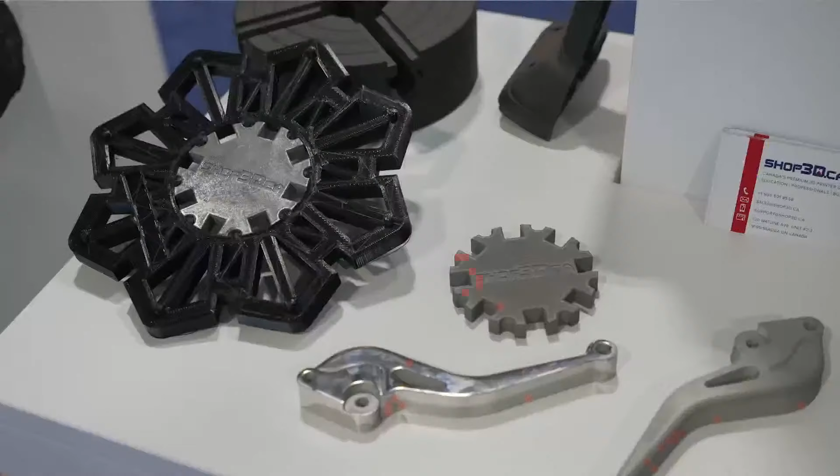Recently, we were at CMTS, a trade show here in Toronto, Ontario, where we had a lot of great questions about this metal filament that BASF has for us for FFF printing. Before we get into that, I want to bring in Emma, who will introduce herself shortly, to talk more about this very specialized filament.

Emma, how are you? Doing great, Ken. Thanks for having me. How about you? Fantastic.

So thanks for joining me today. I wanted to talk to you and have you introduce yourself, who you are, what you do, and also where you're located.

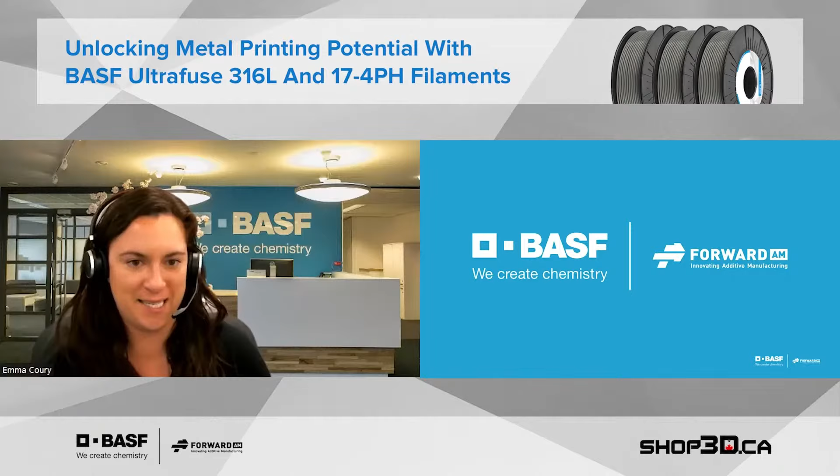Yeah, sounds good. So, hi everyone, I'm Emma Coury, and I am the Applications and Technology Specialist for our filament product line at BASF. So I know that's a lot of words. Really, what I do is I work with our end customers, our distributors like Shop 3D, machine manufacturers, really on any technical project we have for our Ultrafuse filaments. And I am located at our Application Technology Center in Detroit, Michigan.

Amazing. And we're focusing on this metal filament today, but tell us a little bit about BASF Forward AM and what you guys do, in terms of your whole portfolio.

Yeah, absolutely. So at BASF Forward AM, we are the 3D printing group within BASF, which is a really big chemical company, if you're not familiar. BASF Forward AM was established in 2017. Our headquarters are in Heidelberg, Germany, but now we have locations in the US and Asia as well.

We have three product lines: powders, resins, and filaments. I'm responsible for our filament product line, and within that, we have your standard materials that you would use: PLA, ABS. We also have other engineering grade filaments, such as flame retardant options. We have glass fiber and carbon fiber filled materials. We also have TPUs, support materials, and as Ken mentioned, what we're talking about today are our metal filaments.

At Shop 3D, we carry almost all of those BASF filaments, and we love it because it has such a wide engineering range of capabilities. You can pretty much find a filament tailored to your application from the entire portfolio. But of course, today we're going to be talking about one of the ones that we're most excited about, which is metal.

Before we get into metal, maybe I'll just start from the very beginning. Can you give me a brief rundown of what metal filament is and what kind of printers we can use with this filament?

Absolutely. So for the Ultrafuse metal filaments, it's a metal powder combined with a polymer binder system. That polymer is what allows you to actually extrude this material, melt it down. It's not just a bunch of metal powder, which would be a lot harder to process.

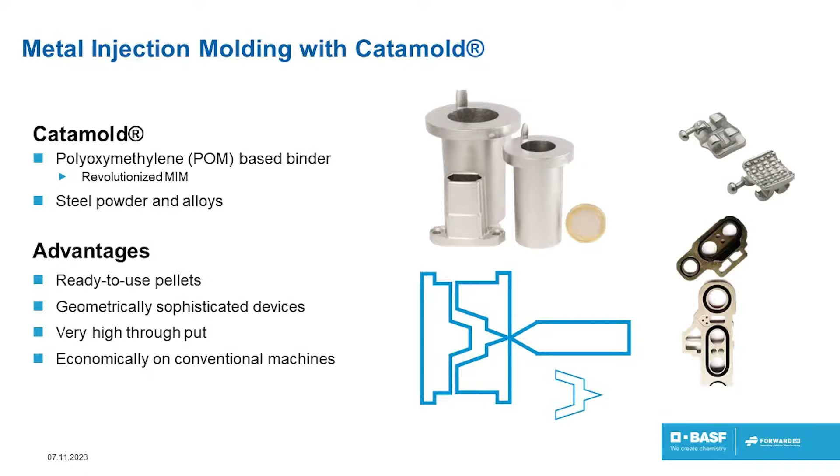For our metal filaments, they can be used on pretty much any open FFF system, which is really convenient, makes it really accessible. In our traditional BASF business, we have what is called the CATAMOLD product line. This is a metal injection molding process, and our Ultrafuse metal filaments are all based on our traditional CATAMOLD technology, really pulling in a lot of that know-how to then create metal filaments exclusively for 3D printing.

Yeah, and this is definitely a first in the industry, and one that really lowers the barrier to entry to printing with metal filaments because, as Emma said, you can use printers like the Ultimaker back here, or you can use Raise 3D, BCN3D, names that we carry, to print this filament. Whereas previously, you would need a much more expensive, much more intense system to do metal 3D printing. So this has really lowered the barrier to entry.

And I think we're going to see some amazing results from this, but I think you have two types of metal filament: 17-4PH and 316L stainless. Maybe you could talk a little bit about the differences between the two and why you have two different options.

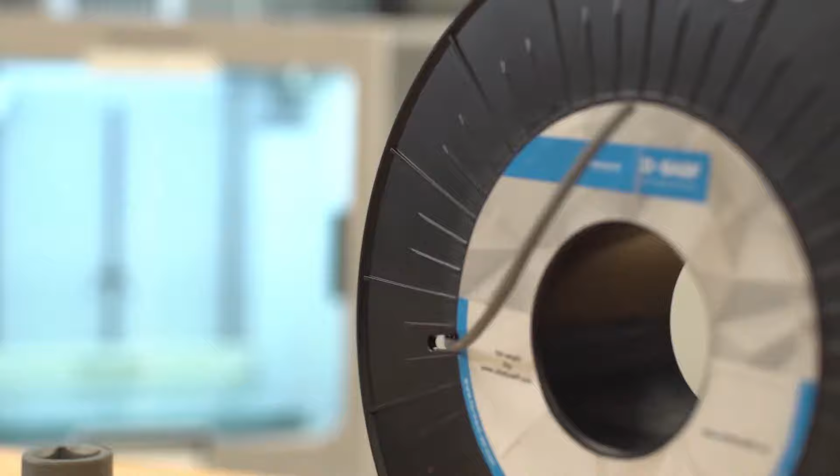Sure. So, as Ken mentioned, we have two different metal filaments. For 17-4PH, the biggest advantage there is really enhanced mechanical properties. It's a very common industrial stainless steel, good mechanical properties, and you can heat treat this metal for even better mechanical properties.

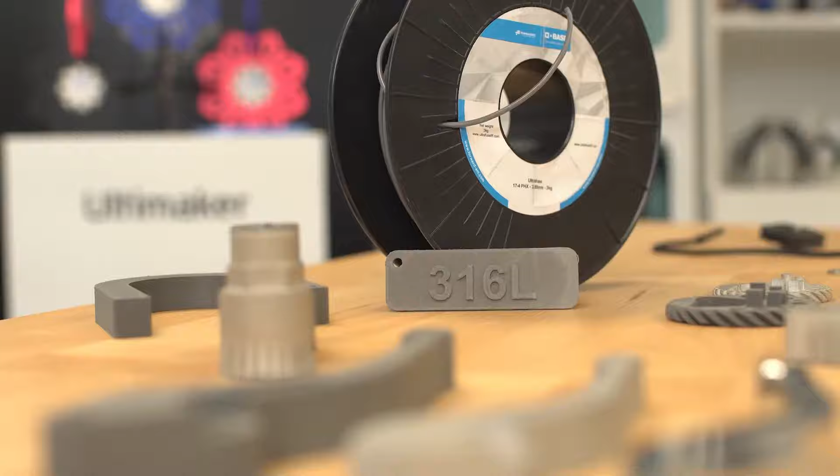When it comes to 316L, it has really good corrosion resistance, and it also is good in high temperature or more humid environments. So those are the big differentiators when you're looking at choosing one over the other. If you're really looking more for the mechanical properties, go for 17-4. And if you need that more specialized corrosion resistance or humid environment performance, then go for 316L.

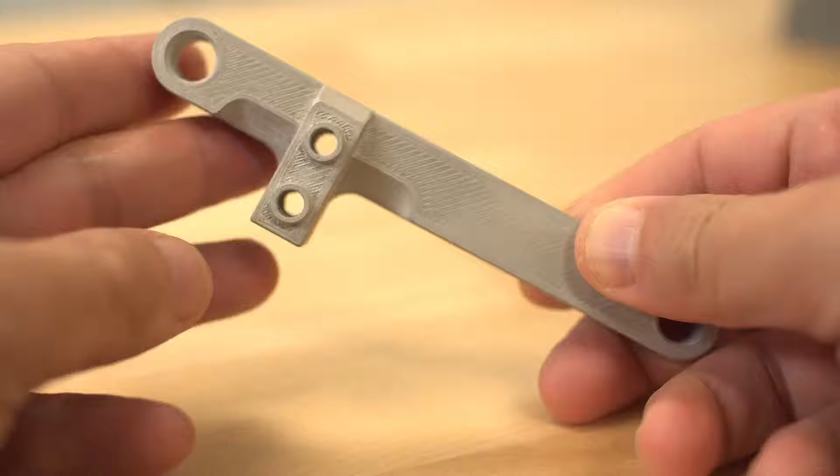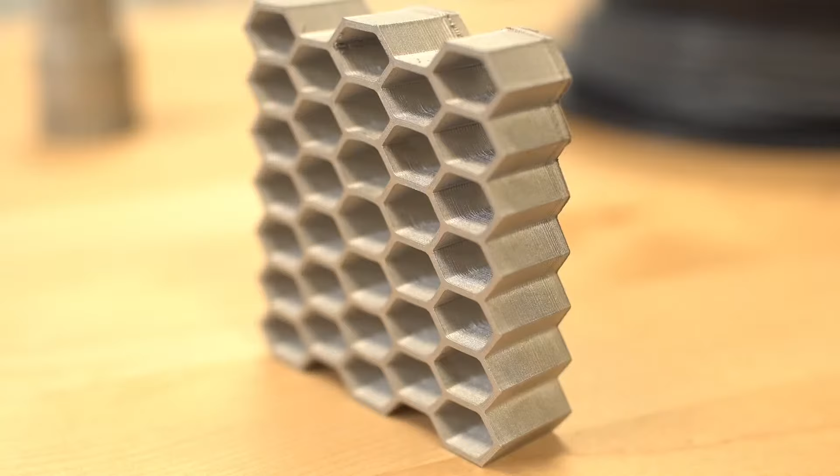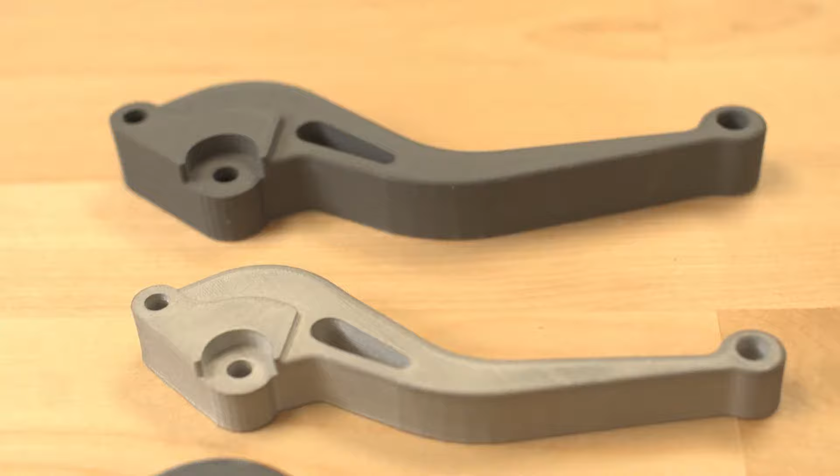And what would be great examples of some simple applications for each of those materials? Yeah, so for both materials, they can be used for customized tooling, jigs and fixtures, and prototyping. These can also be really good for replacement parts. Maybe you have that super old part in your warehouse that you broke or you'd like to have a backup, and getting a new one is really expensive, but you could 3D print it instead, making the cost much cheaper. They're also great for small series production. So if you want to manufacture maybe 100 parts versus 100,000, metal 3D printing is a great place to go for that.

I think one of the things I forgot to address is that sometimes people think metal filament is like the aesthetic metal filament where you have some copper powder inside a PLA and it looks metal, but you're not going to get an essentially metal part. That's not what we're talking about here, right?

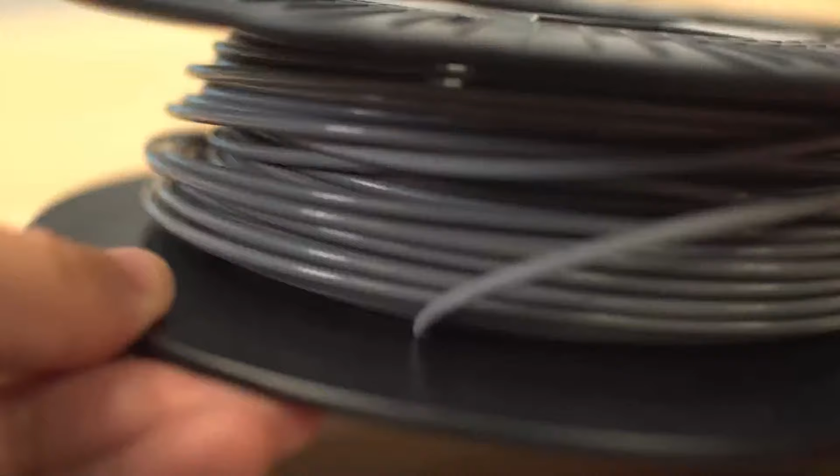No, so this is a true metal filament. When you finish the full process of printing and going through debinding and sintering, you end up with a fully 100% metal part. A lot of people ask me, is it metal? Is it fully metal? Yes, it is. And just to prove the point, I have a couple of metal pieces here, just listen to this. That's going to tell you it's pure metal all the way through, and it's as strong as it sounds. So it's a pure metal print after we get it processed.

But before I get into the processing, let's talk a little bit about the workflow. I think a lot of people are very interested about how they can go from getting a printer and this filament to coming out with a metal piece. Can we start at the very beginning and talk about printing it on the printer? Do you have some best practices? Is there anything special that you need in order to print this filament?

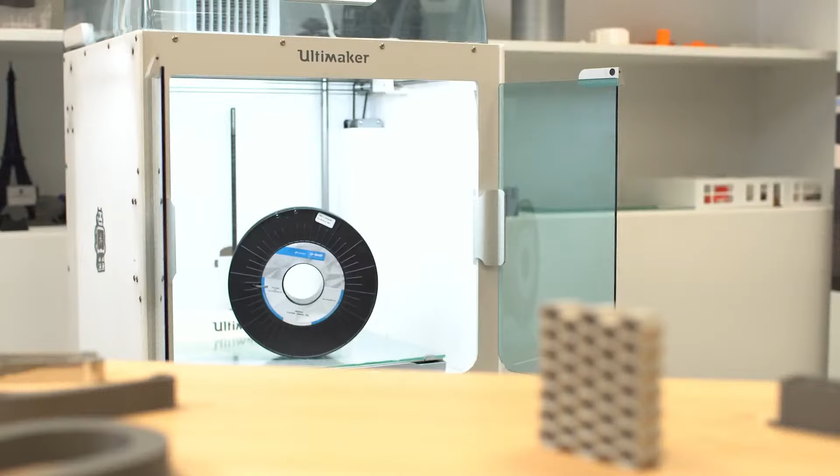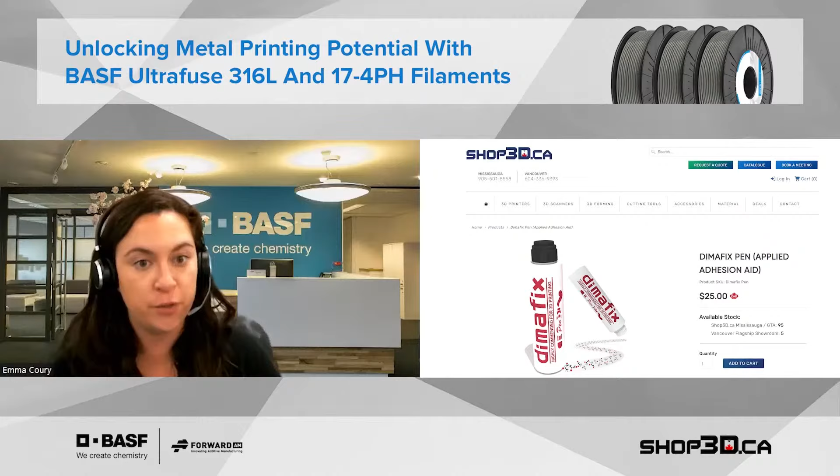Yeah, so for printing a metal filament, I know a lot of people think it seems really daunting, but if you are out there printing a carbon fiber filled material, you can print a metal filament as well. So what I mean is, you don't need a dedicated system or really high temperatures. You can print it on your Ultimaker that Ken has sitting behind him. But what you do need is a hardened nozzle, same thing you would need for other fiber-filled materials, and some adhesive. We generally recommend Dimafix or Magigoo Pro Metal, that's their specific metal adhesive for our materials. Put that down on your bed and you should be ready to go.

And you may think I missed a step, which is drying your filament, but with metal, you actually don't need to dry it, which is another very convenient aspect. That's fantastic. A lot of people worry about that when they're printing with fiber materials like nylon, it absorbs a lot of moisture. So it's very good to know.

In terms of actual printing, what about settings and preparation? Do they need to do anything in their slicer to prepare for metal printing? So to prepare for slicing your part, the main thing to know is that your part will shrink as it goes through the debinding and sintering process. So when you're slicing, you need to scale that part up. In the X and Y direction, we recommend scaling to 119%, and in the Z direction to 125%.

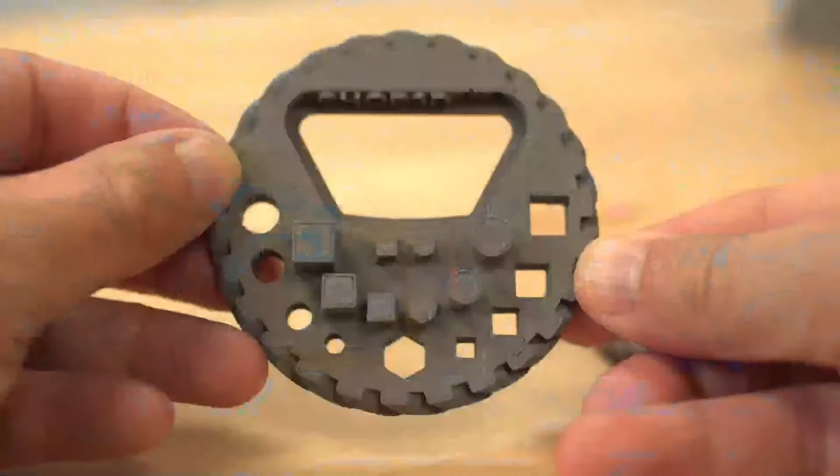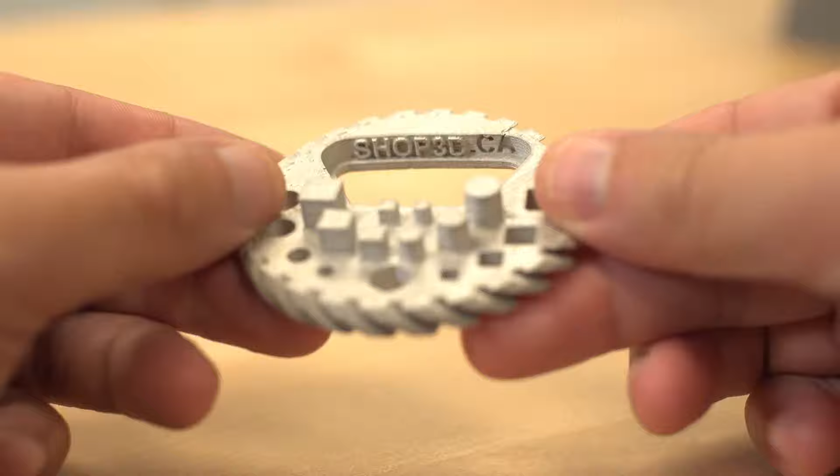Now that's interesting, because why would there be more shrinkage on the z-axis? I guess it's not more shrinkage, maybe it's just gravity. It is exactly gravity. Yep, and that's definitely something we always want to keep in mind with debinding and sintering, is even in the shrinkage you see the effect that gravity can have on a part. And if you design really complicated things, gravity will also affect those. So always good to keep that in mind.

Yeah, I think we'll get a lot into that with the debinding process, but good to know about the shrinkage rates. In terms of handling the printed parts, I actually have a green part that we've printed here, a brake lever, and eventually it's going to get sintered into this part. But what are some of the good practices we should have when preparing a green part before we go through the debinding and sintering process? Yeah, absolutely. So one thing that I get asked a lot is, when your part is printed and it's on the build plate, it can be really hard to get off the build plate.

Something to note before you even get to the green part: to get the part successfully off the build plate without cracking it, soak either the build plate or pour some water on the part. It will dissolve the adhesive and make it really easy to remove. Definitely an insider tip that makes life much easier when removing parts.

Once you get to your green part, you really want to make sure the bottom surface is flat, so you can sand it down. You can also sand the edges. If one part was over-extruded, the green part is fragile, so you can cut it with a blade or sand it down. You can really do nice processing in the green state to get a better looking final part, and even bead blast to remove some layer lines. Working with your part in the green state can really improve the final result.

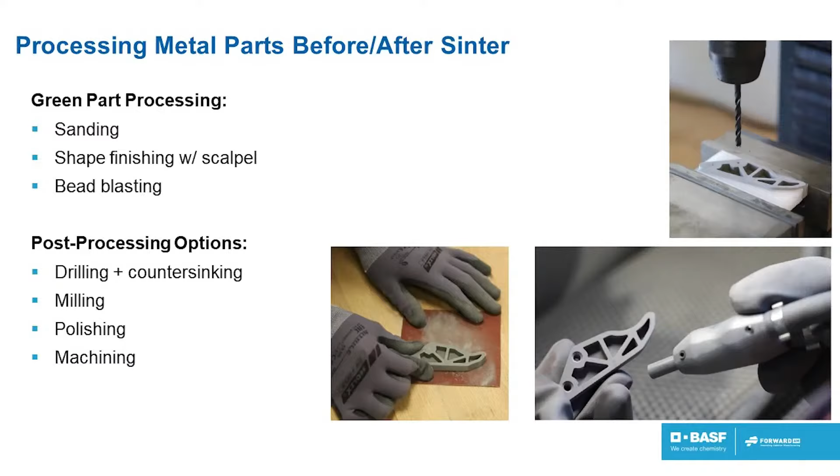That's a good note, because sometimes you have little bits of filament sticking out. You should definitely cut that off and clean it up while it's still in the green state. You can polish it a bit to make it smoother before debinding. The main ways to do that are sanding or bead blasting, which cleans up the surface nicely.

You mentioned it's fragile. So this part is not a finished metal part yet, so I can't treat it like one. If I drop it now, I could break it. Is that correct? Yes, exactly. Even though we'll eventually get to a really strong, durable metal part, right now it's pretty fragile, so definitely take care with it.

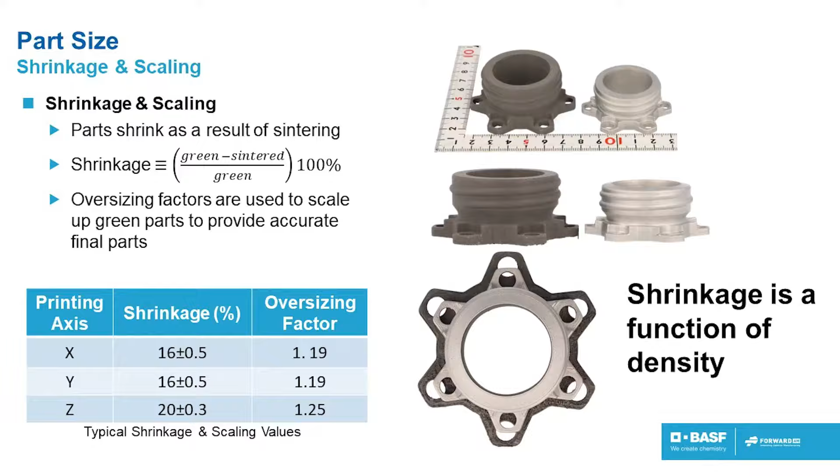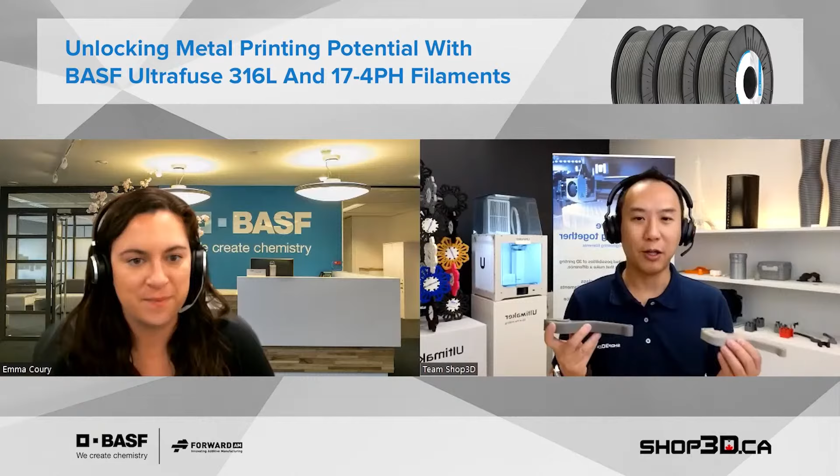So eventually it's going to become a metal part. Maybe I can talk a bit about shrinkage, and also using a raft or some design specifications and recommendations for a more successful print. The process going from the green part to the sintered part, where we don't handle it, is kind of the riskiest part, where the part can fall apart. What are some things we can do to ensure the best success possible?

Starting with your green part, since you have to ship it elsewhere for debinding and sintering, when you ship it make sure it's wrapped in bubble wrap. We like to say make sure your package passes the shake test: if you shake the box and can hear parts moving around, add more bubble wrap. You can never go wrong with more bubble wrap. Really take good care of your parts so they don't break in shipping.

What you also need to look out for is designing for debinding and sintering. If you're printing other filled materials, you can print metal, but the big difference is some of the design constraints. So what are we talking about—handling, support, or overhangs? Kind of all the above and in between.

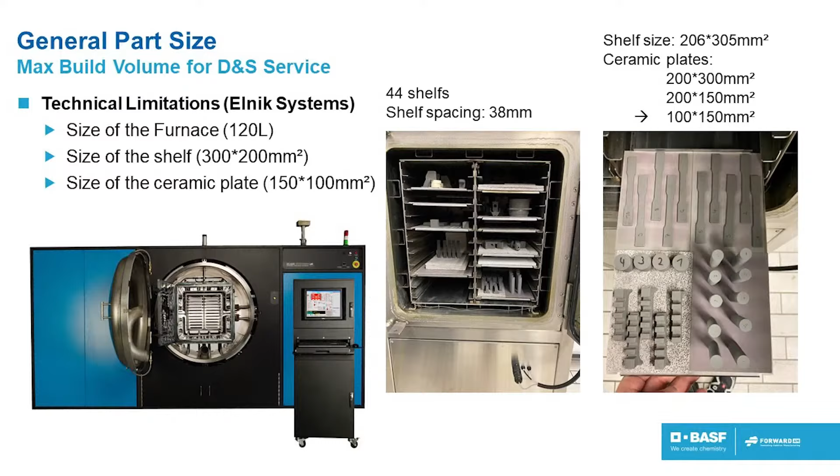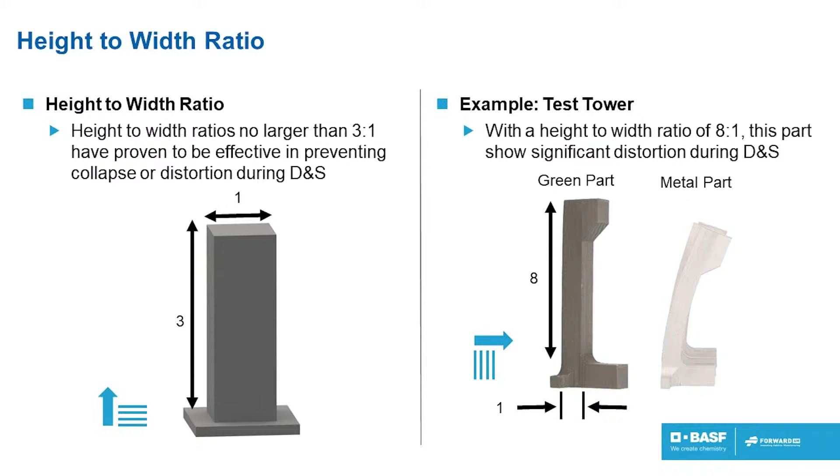One thing to really know is the size limitation. A good quick reference is about the size of your fist—that's about the ideal part size for metal printing. If someone has a huge part they want to print, it might not be successful or the right application for metal 3D printing. You need to scale up to size. Also, avoid a really tall, skinny part, since it could fail in debinding and sintering or collapse under its own weight. Make sure you have an optimal height to width ratio, ideally not exceeding 3 to 1. Also avoid really tall, skinny, thin walls, since some small features might be too fragile to survive the process.

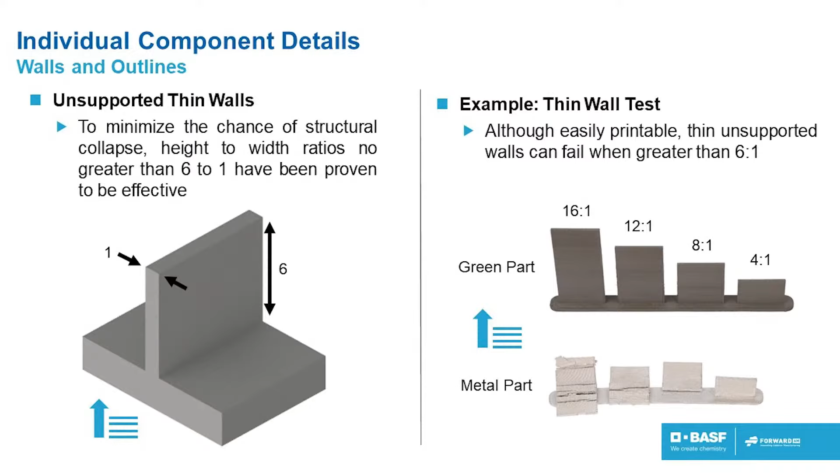I think you already mentioned the shrinkage plate. That one is a really powerful tool and something that can help get geometries that maybe we couldn't have processed before without them warping.

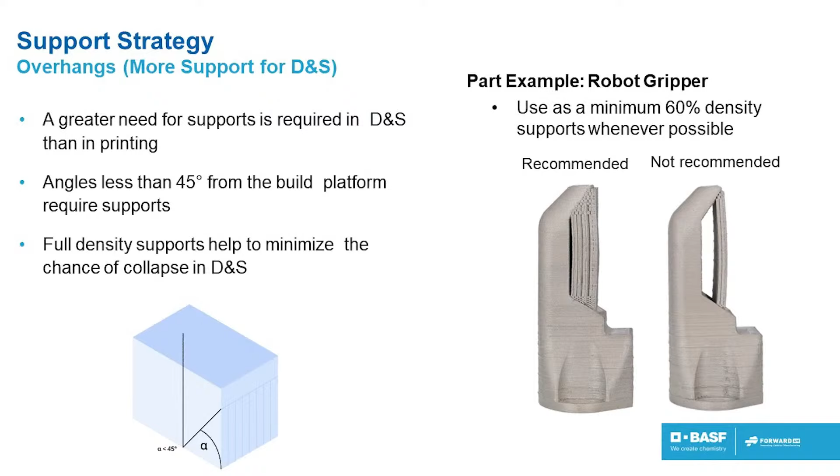So what about overhangs? How do we handle overhangs and support? Depending on where the support is needed, it's possible to print overhangs with metal support, so basically you're self-supporting. Your metal will survive through the debinding and sintering process, supported all the way through, but that means you would need to machine those supports off. So if you have those capabilities in-house or easy access, that really adds on to the possibilities of what you can do.

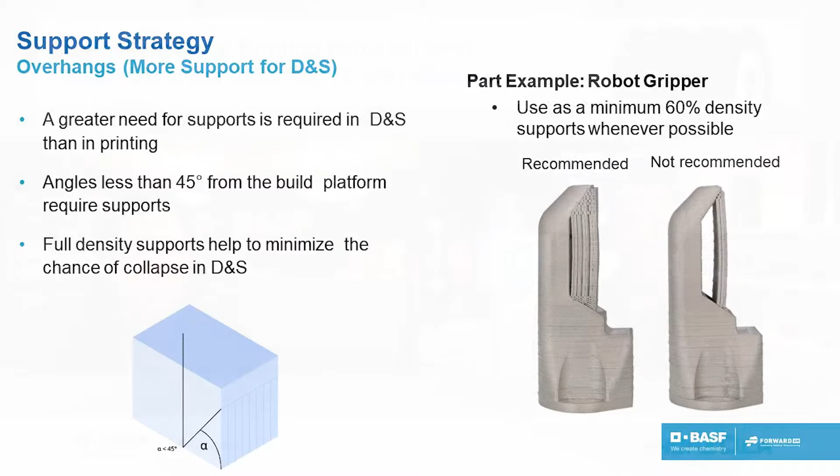Also an option is printing a separate support - maybe if you had an overhang, printing essentially the inverse of your part separately from the actual part. Something really helpful they can do when you send your part for debinding and sintering is spray a ceramic coating on that support. That keeps your support and part from fusing together, but you're still able to support your part throughout the whole process.

So I guess that's safe to say that if you were doing very complicated parts like that, either with thin walls, tall structures, or large prints with support, that almost gets to another level of difficulty that you kind of want to work yourself up to from printing metal. Is that correct?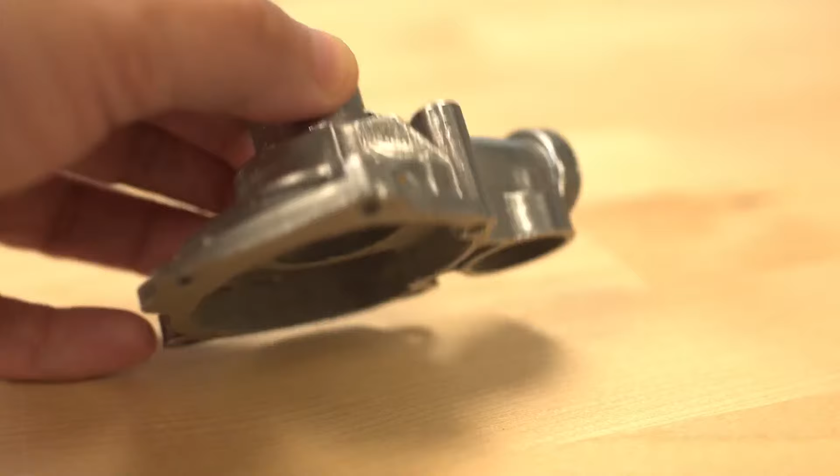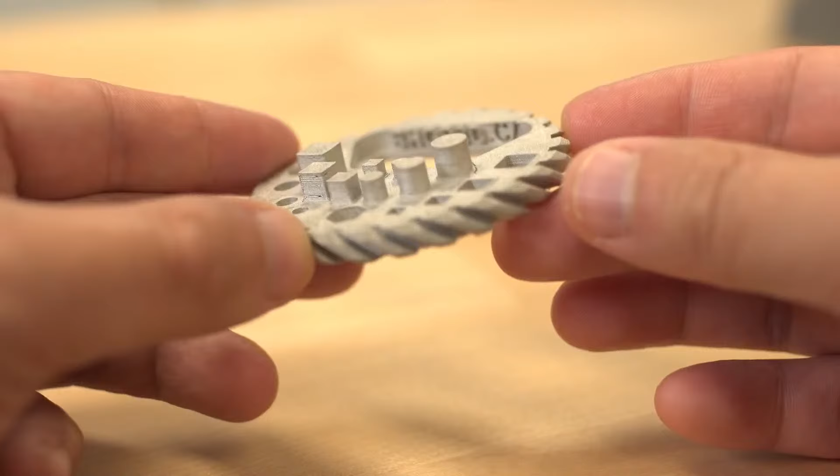Yeah, I would agree. I generally, when people are starting out, like to tell them start with something that is going to work just to get a feel for the process. I think that alone can really give you a better understanding, and then start getting into those more complex geometries. Fantastic, so it sounds pretty simple so far.

We print our green part. We can follow a design guide - I think there's one provided by BASF on best practices and what we should follow in terms of design. So after we do all that and have our successful green part, what happens next? How do we get this into metal?

We actually don't handle processing the green parts here in my lab. We partner with DSH Technologies. They are located in New Jersey and they service all of our North American customers, including all the Shop3D customers as well.

We make a coupon available to purchase on our website where you can buy 1 kilogram of sintering for your metal filament. I think it's only $60 Canadian, which is extremely affordable for the work they're doing in debinding and sintering. So maybe I'm going to let you talk about what that process is like.

Sure. So basically you will ship your green part to DSH, and they are the experts in this process - that really takes a lot of the expertise away from us, and you can rest assured your parts are in the hands of experts. What they're going to do is put the parts through catalytic debinding, and what that does is basically use acid to eat away at all of that polymer binder that is in the metal filament. After that, when you have no more polymer binder, we call it a brown part.

This brown part also has the consistency of like wet sand, so that's really where these design considerations we were talking about come into play, because you need your part to survive in that wet sand consistency. After it's in the brown part phase, the part will then go to a sintering furnace and the metal particles will all be sintered together. This is where that shrinkage occurs, because there's a lot of open space now that all the polymer is gone, so your part will shrink down.

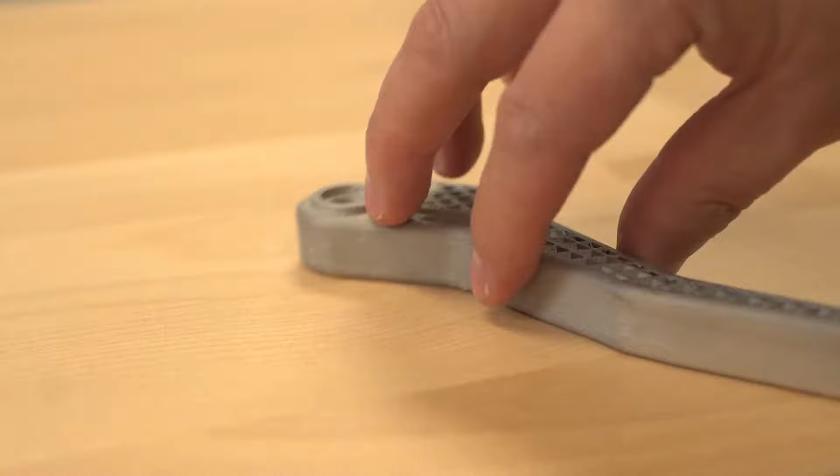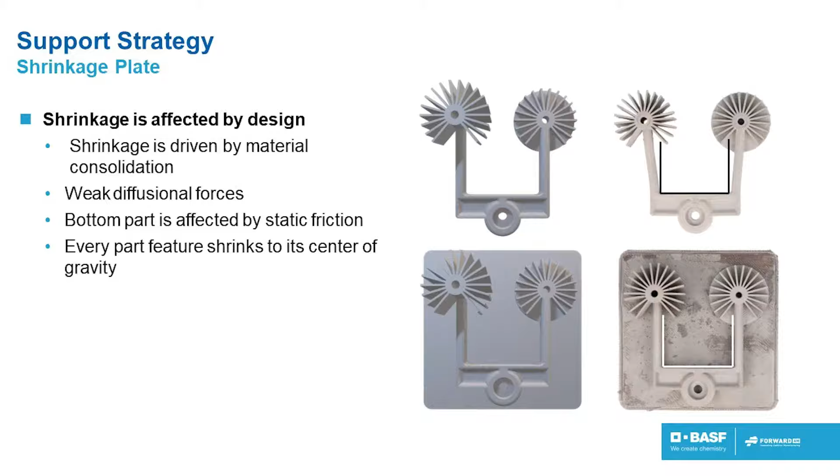Sure, one of the first things you mentioned was warping. A lot of times we'll see warpage, maybe with a more unique shape or a longer part, but a shrinkage plate can really help with a lot of that. A shrinkage plate is basically a separate plate from your part, very dense, printed with highly filled material - just a metal plate you put underneath your part, making sure it surrounds the entirety of your part. When it's going through that sintering process, as it's shrinking down, everything will shrink at the same rate. There won't be as much friction as if your part was resting on a typical plate that isn't moving - everything can shrink in a uniform way, and that really helps with warpage.

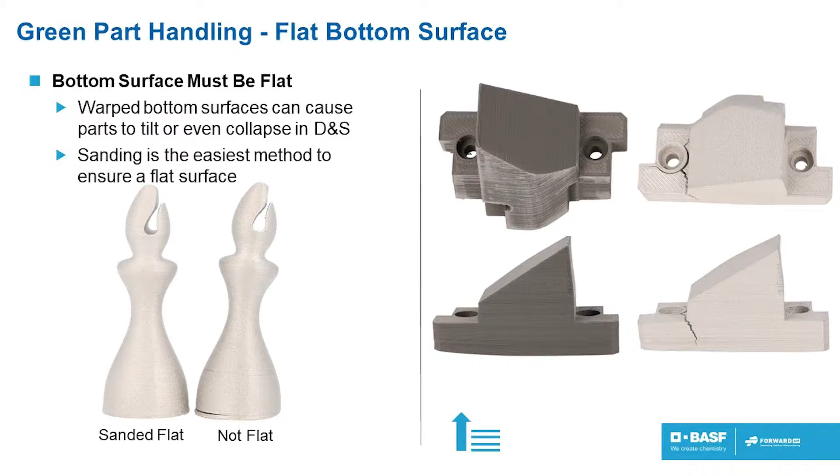The other really important thing I like to point out is that the bottom of the part you send in needs to be super flat, completely flat all the way across. If you tap your finger on it and something's lifting up, you're likely going to have a problem. That's where, if you put an uneven part through the debinding process - again, it's like wet sand - gravity's going to win. That part will just drop back down and you'll have a crack in your part at the end. So that's really where we see the biggest fails.

I think we have to emphasize that during the sintering process, it's going through thousands of degrees of heat, expansion and shrinkage, in order to get sintered together. So all that stress will translate into defects if you didn't follow the design guide, or if your print is uneven.

Early on in our journey for printing metal, we had a couple of applications engineers who wanted to push the envelope - what if we do it just beyond recommended guidelines, what if we made it here, what if we don't support it? We had some epic fails, and that's on us, of course. But we wanted to confirm your suspicions and our suspicions that those design guides are really useful and necessary, but also to see what a fail would look like. Actually, some of those fails look really awesome too, because it does get sintered together.

It looks like this cool metal part that just collapsed in on itself. I don't recommend that, because you're sending in a part that is going to fail, probably causing some trouble for DSH. But I think following the design guide is extremely important, along with the recommendations of sanding it and making sure it's flat.

So now that we have our print back, what can we do with this? This is the finish that it comes back with - kind of like a matte metal finish. You can still see a little bit of layer lines from your printer, it still does show up. But is there any way for us to post-process this even further?

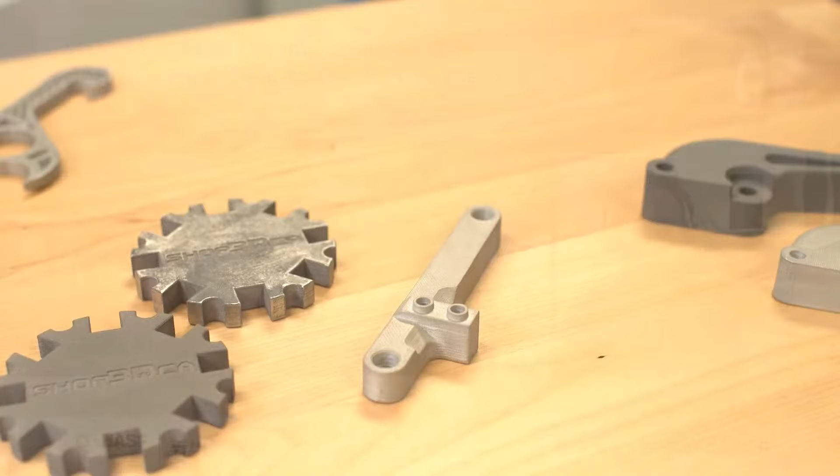Yes, absolutely. Like I emphasized before, this is 100% metal, so anything you might do with a traditional metal part, you can do with a printed part. If you wanted to get rid of the layer lines, you could polish your part - it also makes the part look really nice. Let's say you had some critical features that you would prefer to machine versus print - you could machine this part to get it to the exact specifications you needed, or you could weld the part. So really, the options are endless. Anything you can do with a metal part, you can do with our printed metal.

Amazing, and I actually have a great example of that here. So we have our standard sintered part, and then we have the polished part, which is very shiny metal.

Still all metal. And I think the tolerance you were talking about is very correct. If you wanted to make sure this was the perfect tolerance to fit into your other part, you can just machine out this particular section, and that's probably a little bit easier than trying to predict the shrinkage all the way through for an internal shape.

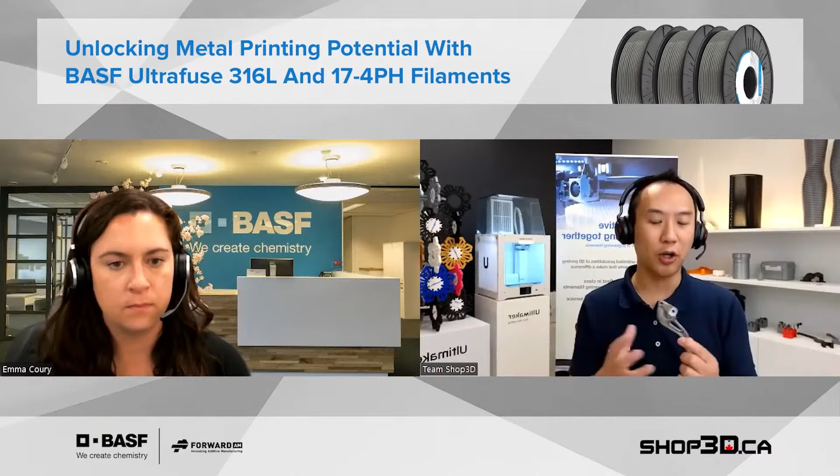Is that correct? Yeah, if you have those really critical features, machining is always a good addition to metal printing. Using those two tools in combination can open up a lot of part geometries and possibilities that maybe weren't possible with just one technique over the other.

And I think that's still in a lot of ways cheaper, faster than traditionally just CNCing out a metal part, especially for certain geometries. This is going to make a lot more sense, especially if it's for a one-off or two-off. Yes, exactly, I agree.

So I think that's covered, the whole process of getting from your filament all the way to a steel part, and even polished and finished up. But I definitely have some frequently asked questions if I could throw these your way.

Absolutely, let's hear them. First one is, how do the parts compare to extruded metal? Because that's one question I got quite a lot at CMTS - they were like, well, it feels like metal, how does it compare to other forms of metal manufacturing?

So when comparing 17-4 printed metal to our traditional Catamold 17-4, it's actually very comparable. This is still a printed part, so with polymer printed parts, you're going to have weaker mechanical properties in the Z direction, or whichever way your layer lines are going.

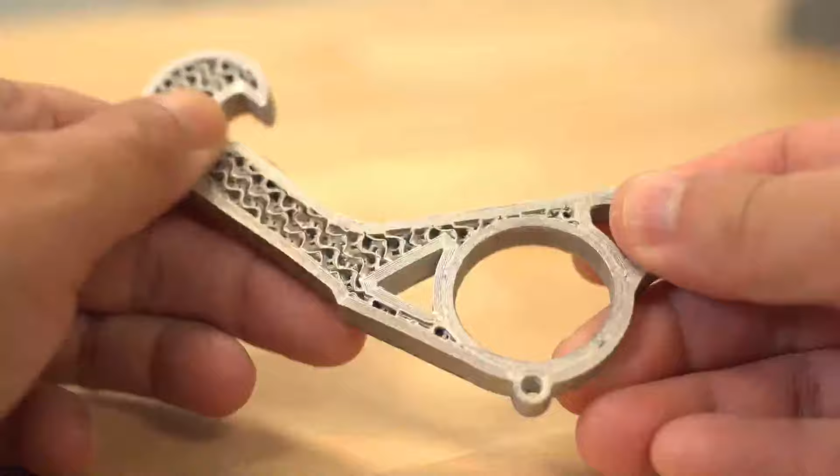One other question that comes up often is, once it is sintered, is it a 100% metal part? So yes, it is a full metal part. There's none of that polymer remaining, so yeah, it is fully metal.

And the polymer that we use as the binder, what is that polymer? So it is a POM. Okay, so that's the binder material that we're burning out with the catalytic debinding. Yep, fantastic. Okay, so that covers a bunch of questions that have been asked of me.

Could we talk a little bit about where someone can find more information on doing this themselves if they're interested? Yeah, absolutely. So there's a lot of documentation both on the Shop 3D website and the BASF Forward AM website. You can find the TDSs we were talking about, process guidelines we're talking about, and even more documentation than that.

Hey, we're back with a live Q&A with Emma and myself, Ken. Thank you for joining us for that webinar. I hope you've enjoyed all the technical details within the webinar, and I think we answered a lot of questions that were submitted to us in advance. So thank you for that, Emma.

Of course. I wanted to bring you back so we can talk about some of the questions that were submitted, and get to some of the user questions they've asked. I know some might seem already answered, but maybe we can reiterate on some of those topics if that's okay with you. Absolutely, let's do it. Happy to answer any questions.

The first question is, can I use the Bambu X1C to print this filament? We don't have a validated profile on the Bambu printer, but it does meet the technical requirements in terms of temperature and other print parameters, so it is possible, we just don't have that validated profile yet. We actually have an X1 here too, one of the printers we resell. We haven't tested the metal filament on it either at this point, but we don't see why it can't be done, so it's a highly likely maybe. If I were to make a quick recommendation, it would be the X1E, because that enterprise version has a heated chamber, which makes it more consistent for heat while printing the filament. But if you already have an X1C, giving it a try is probably a good idea.

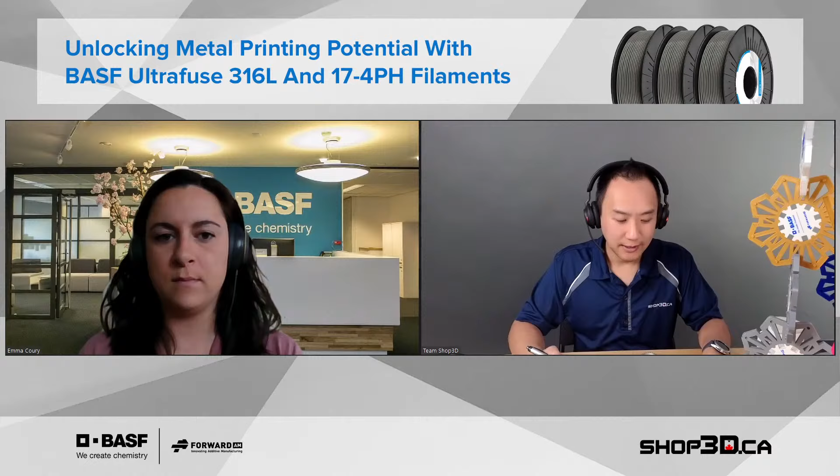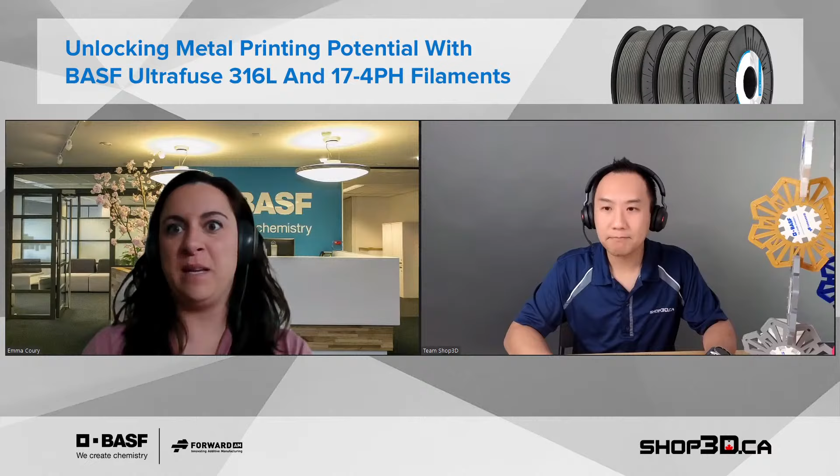Secondly, how reliable are most parts printed with this product compared to CNC machined parts? I think they're asking about tolerances here, and a little bit about strength as well. In terms of strength and mechanical properties, one thing that's really nice about our TDS is they actually show at least a metal injection molded part of the same feedstock. So 17-4 feedstock versus 17-4 printed, they'll show that comparison of mechanical properties, which is really nice.